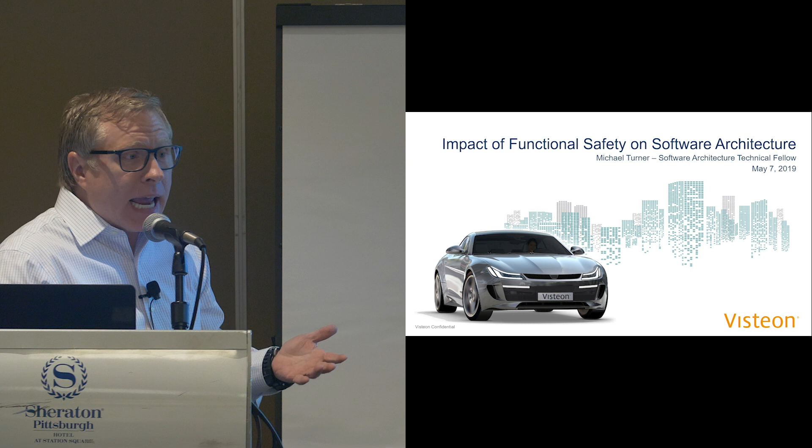So the title is Impact of Functional Safety on Software Architecture. That's a mouthful. When I created the presentation, my first question to myself was, this is actually a question mark. Is there an impact of functional safety on software architecture? We know there are quality attributes and techniques and tactics. So the idea is, when we're applying this idea of safety to other industries, is it the same? Is it different? Is it new? That's what we're going to discuss today.

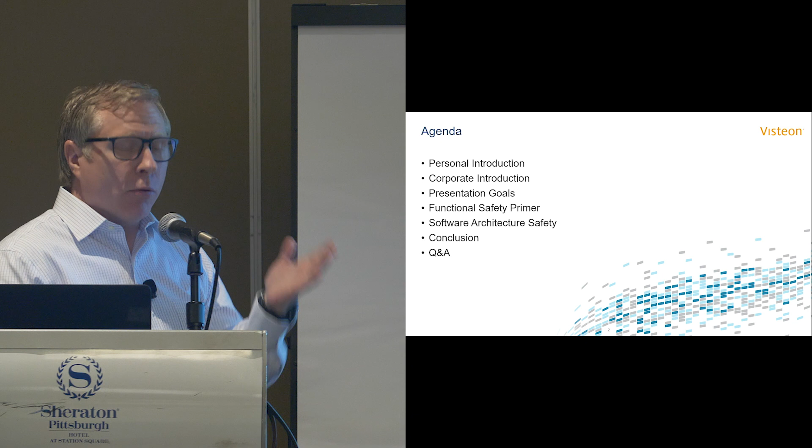Just a brief agenda. I'll give a very short introduction of myself and the company I work for, Visteon Corporation, and then a couple of goals for the presentation. We'll spend most of the time discussing what is functional safety. If you get only one thing out of today, that would be a good takeaway. Then a brief connection of that topic to software architectural safety, and then we'll conclude.

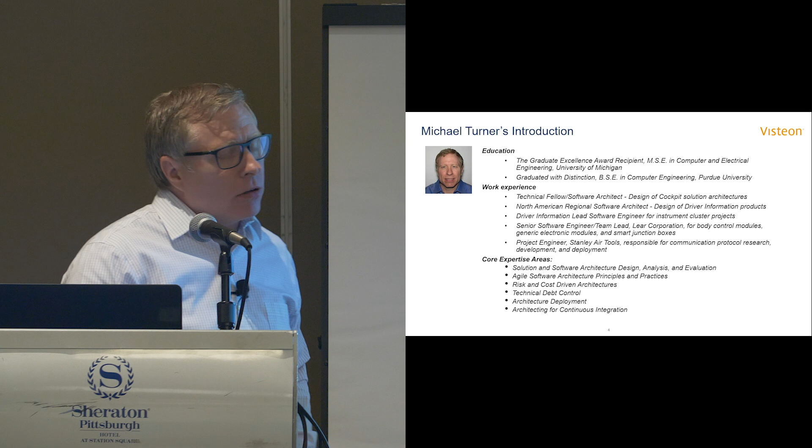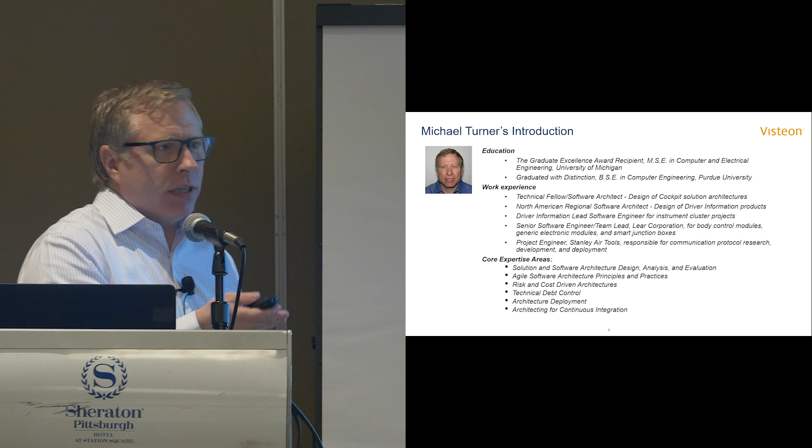I've been working in the software engineering space for approximately 25 years, most of that time in embedded systems, hard real-time, deterministic systems, mostly in the automotive industry, a little bit in industrial tooling. In that time I've seen a lot of growth, both in software functionality and complexity, and the requirements we're trying to achieve. Architecturally, things look a lot different now than they did 25 years ago. Even in the automotive space, what you're seeing in the vehicle is greatly different than just a couple of years ago, and that all impacts us when it comes to architecture.

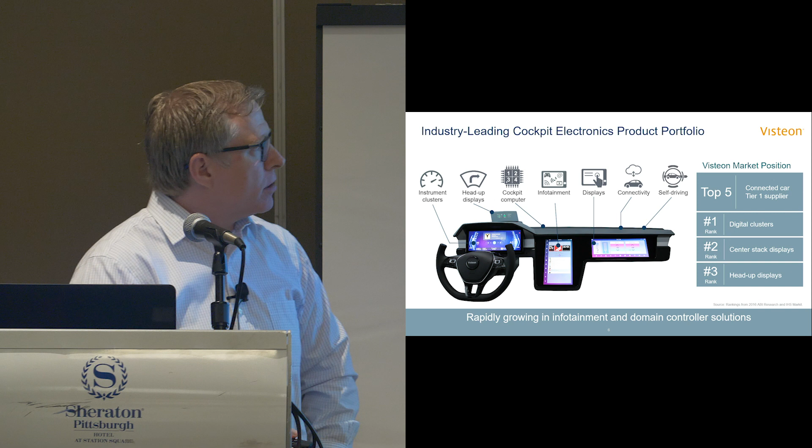From a corporate standpoint, I work for Visteon Corporation. We're what's called a Tier 1 supplier, so we supply complete solutions, and you can see the spaces that we focus on. Cockpit electronics is the terminology, and today's vehicle cockpit would look similar to what you're seeing here. We focus on, or we're the leader in, the digital cluster space. If you had a vehicle 5 years ago, you might have seen physical gauges with stepper motors there.

Maybe a mechanical-looking odometer. Today, it's a little more obvious what's happening behind the scenes. You're seeing a display and a lot of electronics behind it, so it's a little more obvious. There's a lot of software here now. Where it wasn't so obvious before, there was a lot of software behind all those gauges and chimes and things that you might have heard in your vehicle a few short years ago.

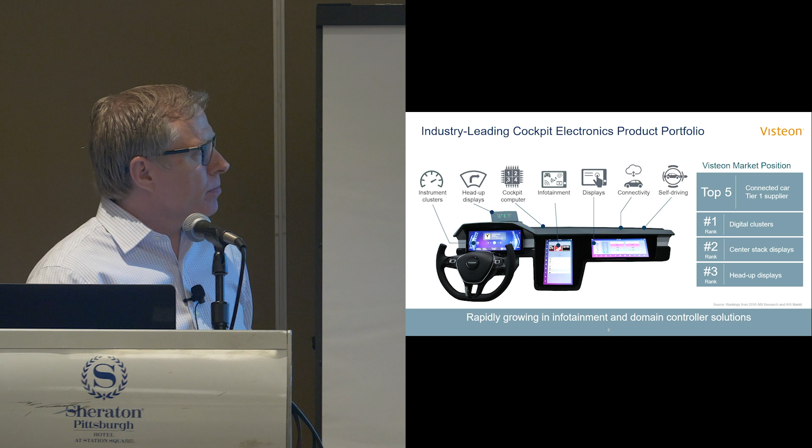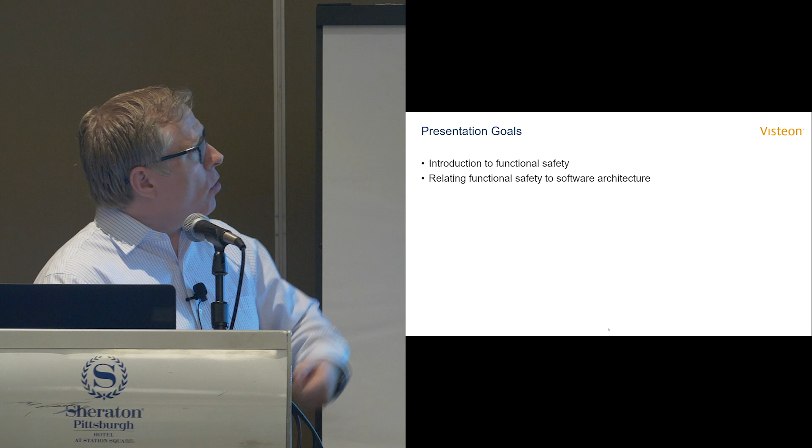So the goals again for today: I want to introduce this concept of functional safety. If you were at the keynote this morning, you saw reference to some standards - ISO, IEEE, UL. We'll be talking about one particular standard that Phil mentioned in the keynote, ISO 26262, and going through it. It's not important that it relates directly to the industry you're in - the point is to look at what these standards are saying from these regulatory or standards organizations and how that impacts us as software architects. The second goal will be trying to relate that to the things we know about software architecture.

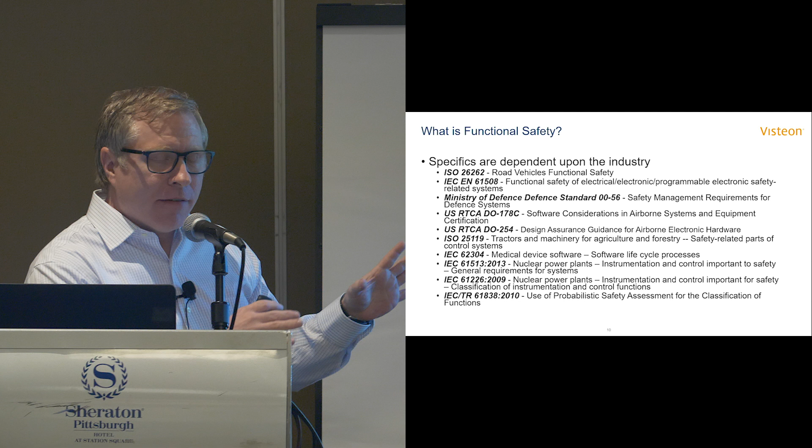Okay, so functional safety, what is it? Based off the presentation we just saw, the answer is: it depends. Depending on your industry, you may have a standard on what functional safety is. I have only a few examples here, but you can see it spans many industries. I live in the automotive space, so that's the first spec, but you'll see defense, tractors and machinery, medical, nuclear - it makes sense on some level that anything that can cause harm or go awry should have some sort of standard, and that's what we're trying to represent here. I'd challenge you, in the industry you're in, if you're not aware of it, to do a little research and see if there's a safety standard for functional safety. Now I'll describe what functional safety actually means, and here we're going to dive into the ISO spec, which is applicable in the automotive industry.

So if we read the definitions, it's actually a chain of definitions. I won't read them all, but I do want to go down about halfway. The first definition: absence of unreasonable risk due to hazards caused by malfunctioning behavior of electronic and electrical systems. That's a mouthful, and it has other questions in there.

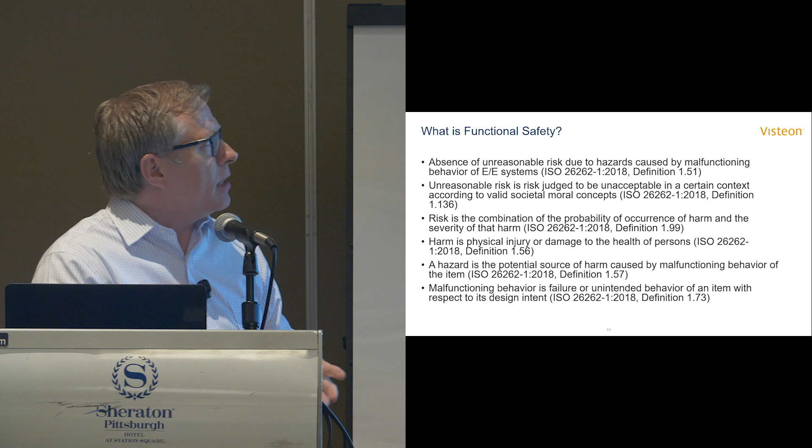The first question might ask, what's unreasonable risk? Unreasonable risk is risk judged to be unacceptable in a certain context according to valid societal moral concepts. And now we're getting into societal impact. So we ask ourselves again, okay, unreasonable risk is risk. So what is risk? Risk is the combination of the probability of occurrence of harm and the severity of that harm. So now what is harm?

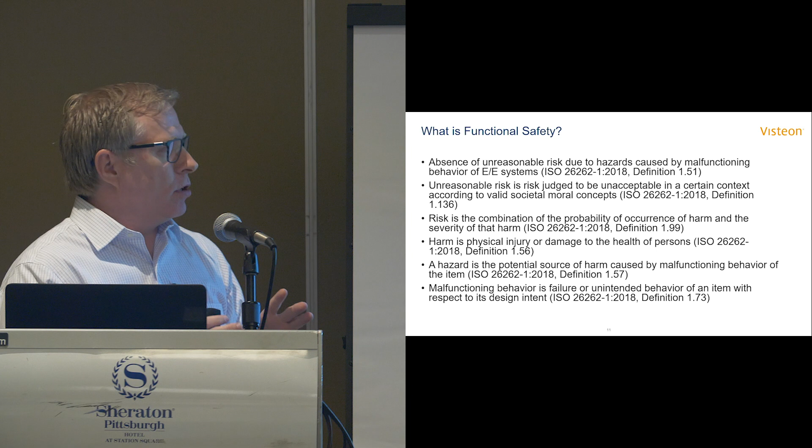Harm is physical injury or damage to the health of persons. And that's as far as I need to read before it hits you in the face that we're not talking abstract concepts here anymore. We're talking about actual people and danger.

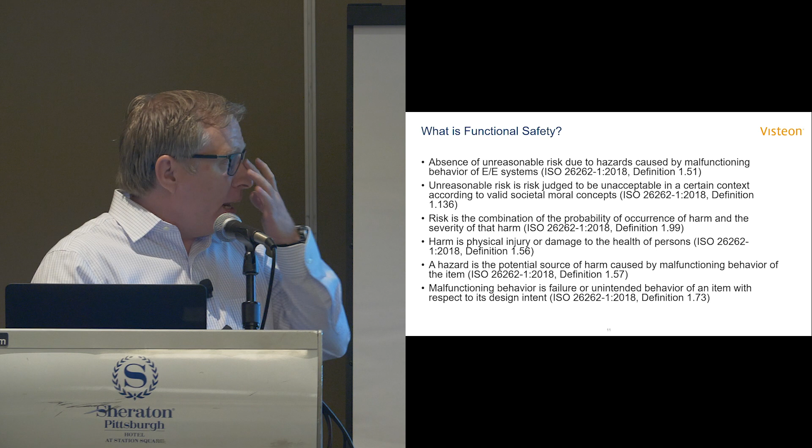And depending on your industry, this may be well known. If you work in defense, if you work in the aircraft industry, and this is the automotive industry. But I would again challenge you, even if you're working in consumer electronics, there is the chance to do real physical harm to people. We saw in the keynote this morning some of those dangers. It's hard to even know what the risks are.

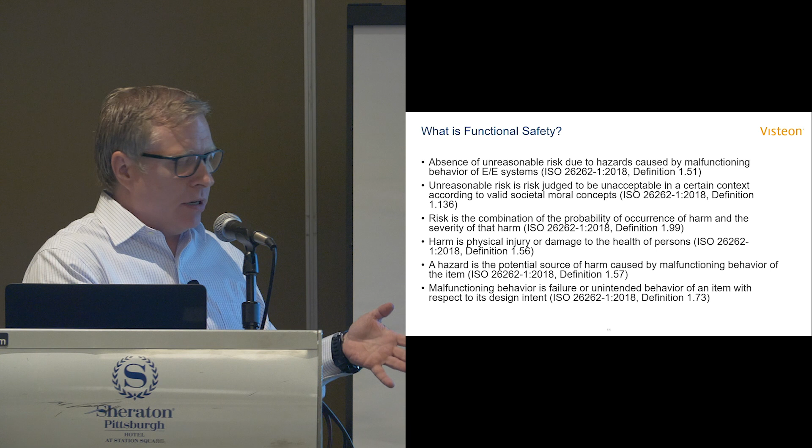And we need to start thinking about these are real risks to real people. We're not talking about just, okay, if my process crashes, I need to restart it. Yes, that's true. But do you need a duplicate process? Is restarting it the best course of action? Maybe you delegate the work. These are the questions we need to start answering.

Okay, so ISO 26262 is, again, the functional safety standard for automotive. And it's a large set of standards, not just a one-pager. There's hundreds of pages with hundreds of statements in there. I picked three key concepts for today.

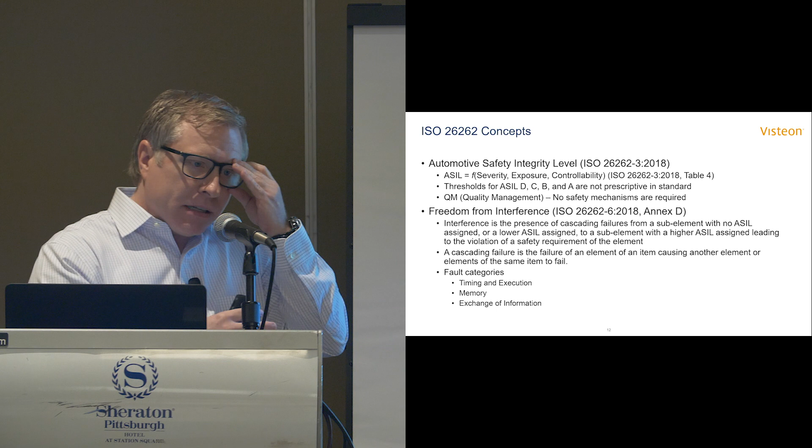One will be, how do you categorize functional safety? Obviously, certain functions need to adhere more strictly to safety standards than others in a vehicle. Second is, if I have some level of functional compliance on function A, how do I keep that from interfering with another more safety critical functionality in the vehicle? And then third, we'll talk about other areas of development that we need to look at safety from a software architecture standpoint.

Okay, so the first is called automotive safety integrity level, and that, if you want to think about it, is a categorization of functional safety. The idea is that you need to take the severity, the exposure, and the controllability. And there are ways in the standards to classify what safety level is needed for that functionality. And for severity, we're actually talking about harm.

This ranges from there's no harm if this functionality goes awry, to real life-threatening physical harm to somebody. The exposure is, think of it as the probability that, in this case, the vehicle would be exposed to the event that could cause that harm that we're trying to avoid. And the controllability is, for us, we're talking about use cases really. So think of actors, which would be a driver in this case. What is the ability of the driver to avoid exposing the vehicle to the conditions that would cause the harm?

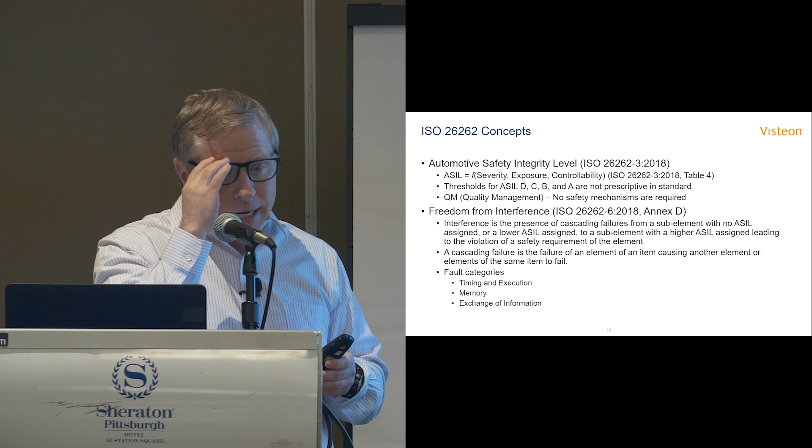Okay, so after the safety integrity level is determined for functionality, then we want to ensure that we have this concept called freedom from interference. This is a way to guarantee, in theory, that one of these lesser safety critical functions does not interfere with one of the higher ones. So if we say something is ASIL A, we want to ensure that if that does fail, it does not adversely impact something that is safety critical. And that concept is called freedom from interference.

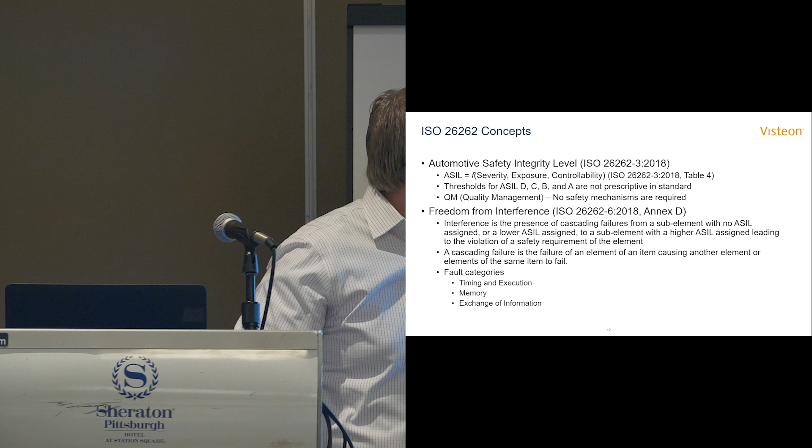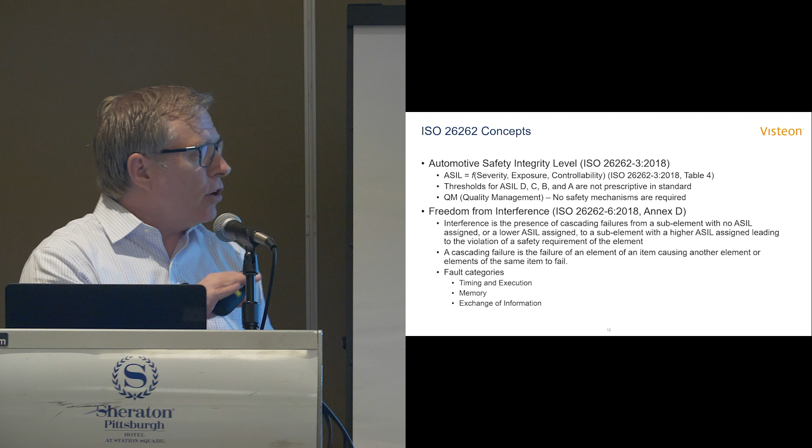Now at the bottom, you'll see some fault categories. And if you look at those categories for faults, you may recognize these. Okay, as software architects, we know about these already. There are timing considerations, memory protections, exchange of information, which is communication mechanisms. So for us, you're starting to see whatever terminology is used in these standards, it's not new information to software architects.

So if we go through these fault categories, let's briefly go through here. We're dealing with timing and execution. What does this mean? The types of faults that could happen are things like deadlocks and live locks, or incorrect allocation of execution time for one safety critical functionality versus something that's not.

In the protection mechanisms, if you read through them, you'll see fixed priority based scheduling, time trigger scheduling. Again, if you're familiar with the quality attributes, we're starting to see here some tactics we know about to adhere to scheduling that we're trying to achieve.

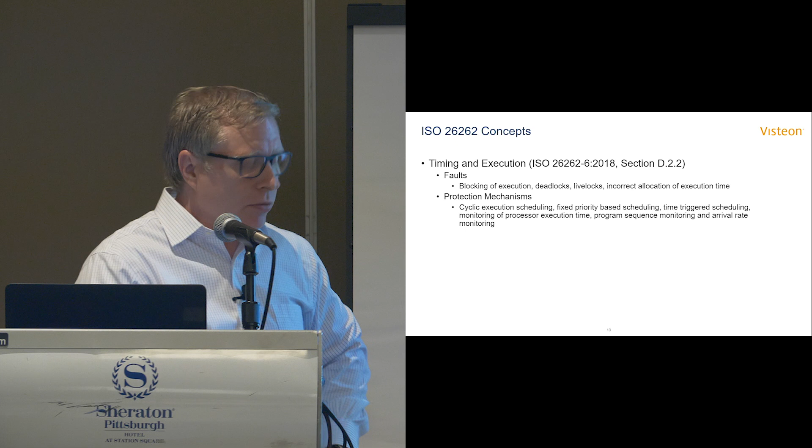Okay, so that was so far, how do you categorize faults and safety functionality? Second was, given that, how do we protect one level from another? And this is the third set of concepts from at least the automotive specific specification.

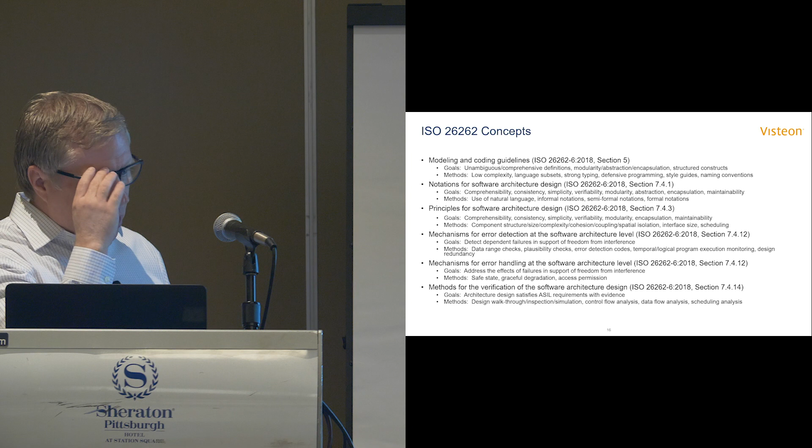This is part of that process, that as software engineers in the automotive industry, we are expected to go through the ISO standard. We're expected to adhere and then justify that we have taken all of the steps we can to do any one to n of these methods to prove functional safety.

So again, for modeling, you can have strong typing, defensive programming, style guides in your organization, naming conventions. That's at kind of the coding and modeling guidelines level.

Notationally, for us as architects, I'm sure we have all published what we think are standards within our organization. And the key is to make sure that those standards also satisfy whatever functional safety standard applies to your industry.

So for automotive, you'll see some of the methods here: use of natural language, informal notations, semi-formal notations, and formal notations. Now, according to ISO, UML and SysML are semi-formal notations. So that gives you an idea of where we're falling in.

And again, depending on the safety that you're trying to achieve for a particular function, you would apply one to n of these. It's not an either-or case.

Next is principles of software architecture design. And what are we trying to do here? Consistency, simplicity, a lot of the abilities. And the methods are reducing size and complexity, adhering to cohesion and coupling standards, increasing, decreasing—it's a balancing act.

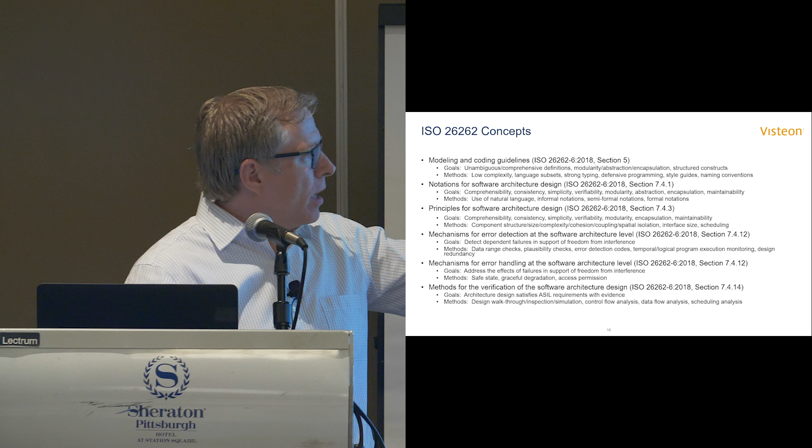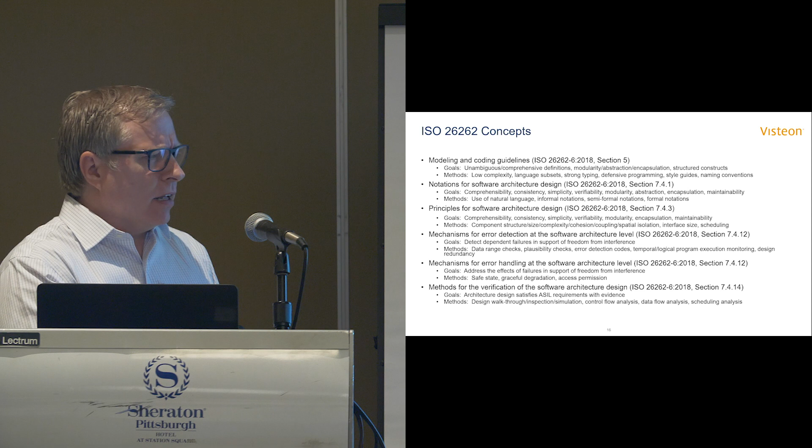The idea is that you need to verify the design as well. It could be as simple as design walkthroughs, although those aren't always simple, to some analysis of your scheduling, control flow analyses—things we are probably doing, but they must be documented and proven to work for the functionality that's in question here.

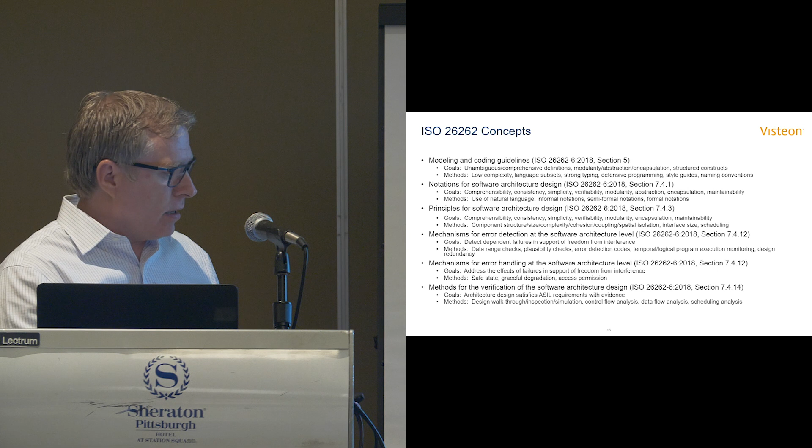Okay, so from a software architectural safety standpoint, what are we talking about here? There are really two topologies I've chosen for this presentation, though I'm sure there are more. One view is that safety is bidirectionally dependent on other attributes of the architecture, such as availability, security, or performance. That's certainly one way to view it - you can't achieve safety if the software is not available or not secure. And I would say that is a true statement.

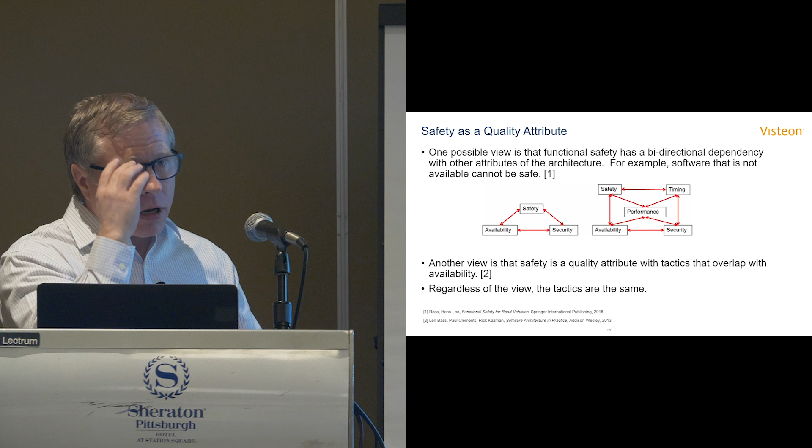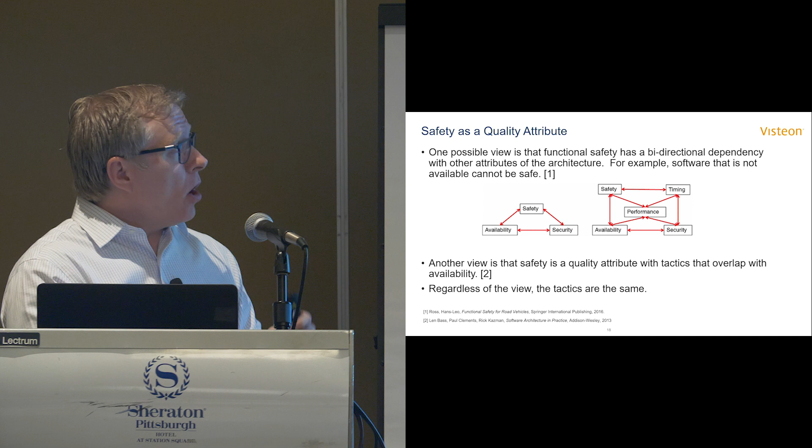Secondarily, one of the texts that we probably all know well from SEI states that safety is its own quality attribute with tactics that can overlap some of the other quality attributes like availability. What I'm claiming to you today is that regardless of the topology or your view, the tactics we can use to achieve software architectural safety are the same.

Okay, so what are those tactics? This is a list of tactics that if you went through the prior slides on the presentation and picked out a lot of those methods and goals and mechanisms, you can start to map those goals, methods, and mechanisms to tactics that we know well. I've listed them here.

Currently, you can attribute those to certain quality attributes like availability, modifiability, performance, and security. But the real takeaway is that regardless of the standard you're reading, our goal as software architects should be to determine whether we have the tools already to achieve what we're being asked to do. Is this a new way of packaging information we already know, or is this new information we need to research? That's the real question we need to ask ourselves as architects.

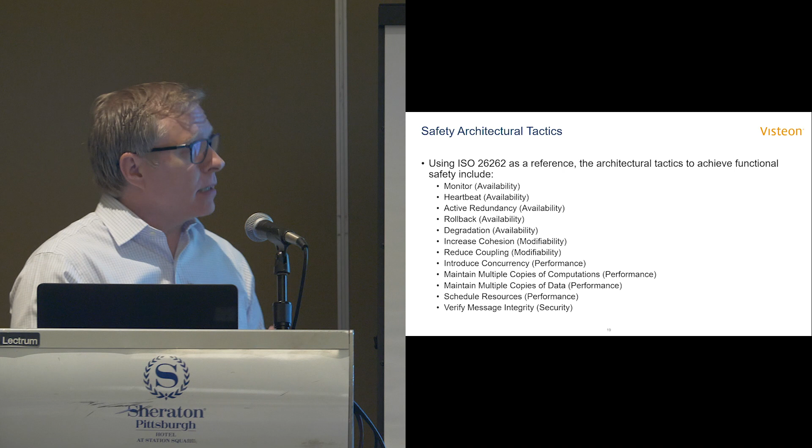Okay, so for this talk regarding automotive, there are really two conclusions we can make. Number one, functional safety expands the notion of safety that we already know as software architects, but it applies it at a system level.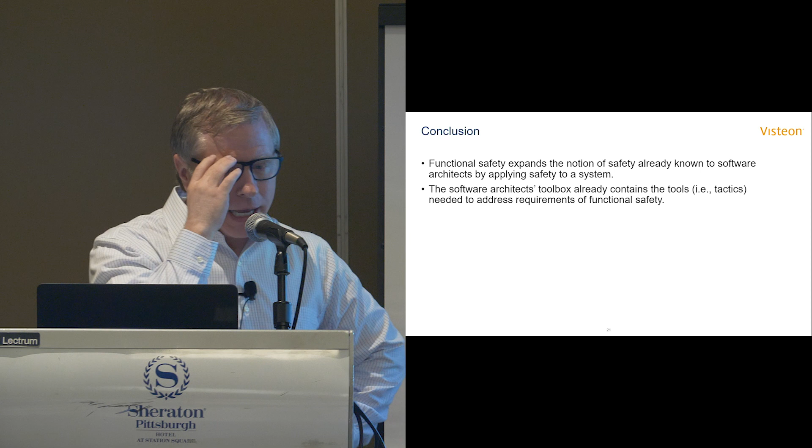One thing I can point out is, if you look through a lot of the discussion points around safety, software is a portion of that, and there's no doubt about that. But software is not the only portion. If the functionality we're dealing with has electrical components, mechanical components, chemical, that all needs to be analyzed. Safety may be software may be a huge portion of that or a minor portion, and it depends on the industry.

In today's world, you can imagine in automotive, software is a large portion of safety - we have a large role to play there. But functional safety is a system specification with sub-specifications for each of these disciplines, let's say.

Okay, the second conclusion we can make is that we have a very diverse toolbox as architects. One of those tools is the idea of quality attributes and tactics and the various analysis methods that you're going to hear about this week.

And what I'm claiming right now is that it is my opinion that these tactics we know and are going to learn about this week in many of the good speeches are sufficient right now to satisfy most of the functional safety that you'll see. Our challenge is to determine where are the gaps in what we know today versus what is published out there.

And so really what I want to leave you with is just one statement. This morning you learned about autonomy, and I didn't talk about autonomy here. As Phil mentioned, there are other standards and regulatory questions around that. But autonomy aside, you come from various industries.